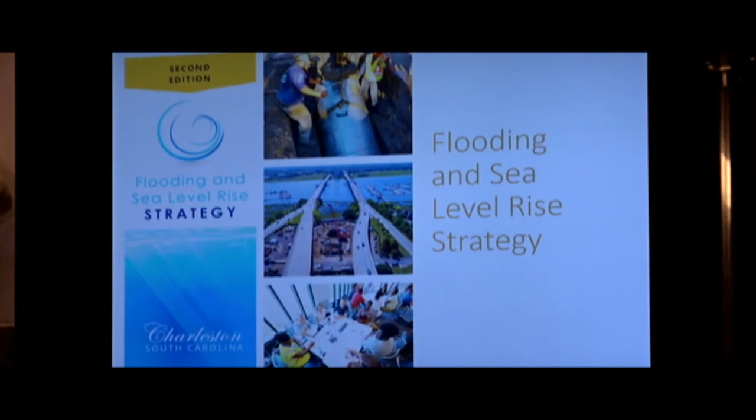At the next City Council meeting, I will be presenting to you the revised flooding and sea level rise strategy for the city of Charleston. Let's have a little history lesson first.

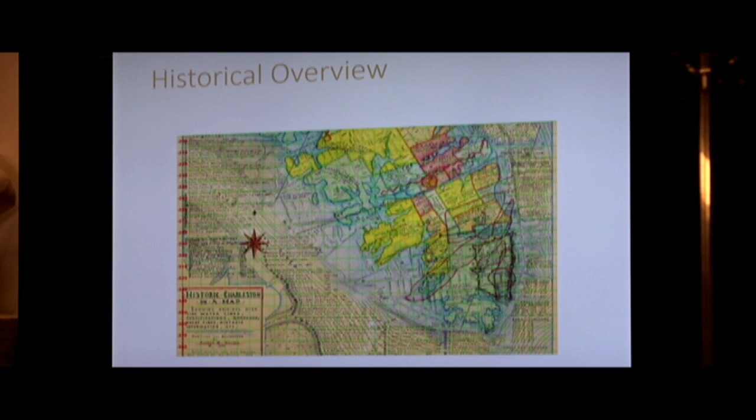If you look at this old map of Charleston, you'll see the blue areas are in fact where creek beds and marshes once were. Councilmember Mitchell, your home is in one of them. And that's where we have historic flooding in our city.

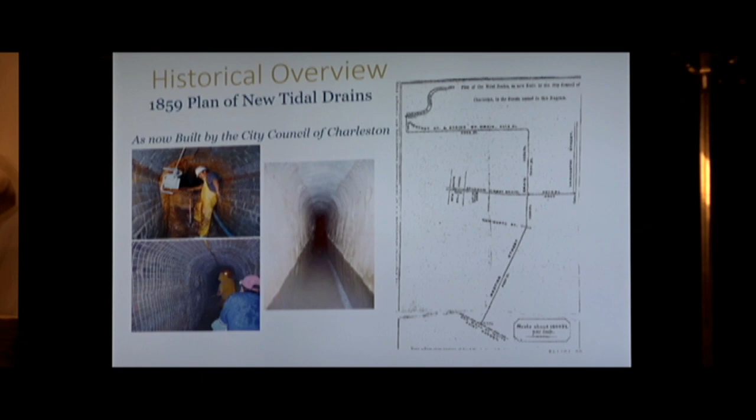So in 1859, the city in earnest first started building infrastructure to deal with drainage with these archway tunnels. The first one came down Meeting Street and ends at White Point Gardens. Tonight we approve adding a check valve at the end of that very drainage tunnel.

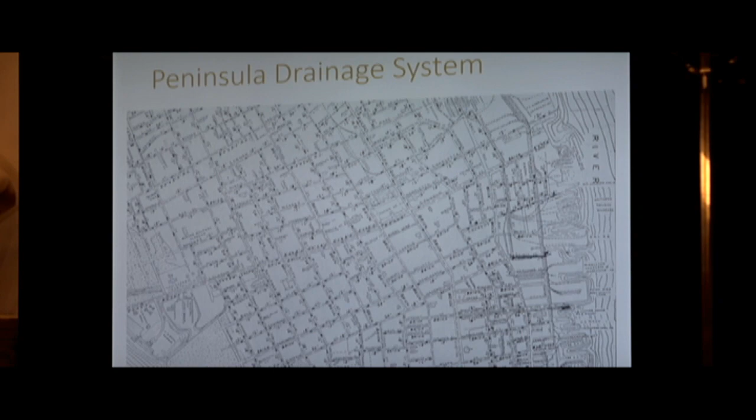Over time, the peninsula developed into this grid of undersized and inefficient pipes and flooding features that don't meet today's requirements. Likewise, West Ashley developed over the decades, first while it was outside of the city, without real requirements from the city, and also those drainage features, as we know, are inadequate.

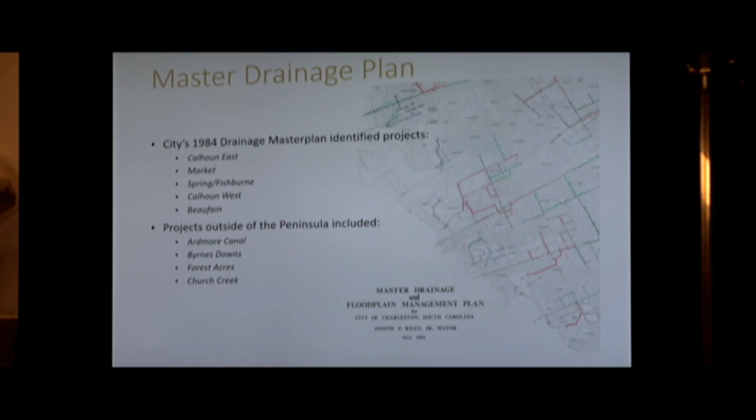So the city, back in 1984, even before Hugo, knew we had to deal with flooding and drainage, and requisitioned a master drainage plan that came up with a number of projects, some of which we're still working on today. But what happened over the last four years?

We've had historic flooding, extreme weather, hurricanes year after year. 2015, the 1,000-year rainfall. 2016, Hurricane Matthew. 2017, Irma. We had a close hit with Florence last year.

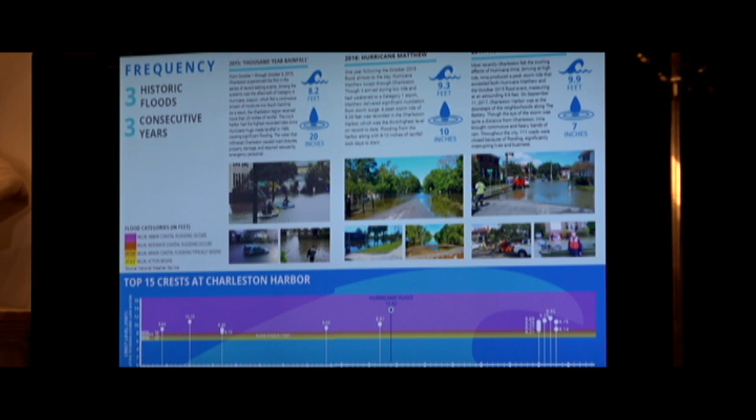Relying on science, we now know that sea level is truly rising. In the harbor of Charleston, it's actually been documented over the last 100 years that the harbor of Charleston has risen nearly 18 inches. Very reliably, the city believes in the next 50 years there will be a sea level rise of 2 to 3 feet. That's what we're planning for.

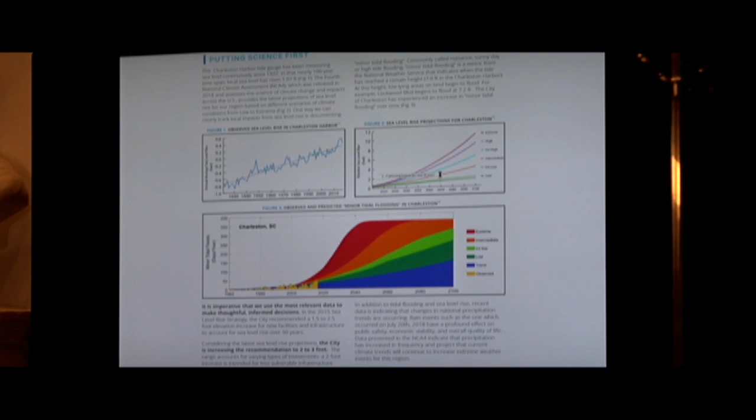And if you combine the extreme weather that we're seeing, the sea level rise that we know is coming, we have a situation that presents an existential threat to our city. If you look out generations to come, we must deal with our drainage and flooding issues and sea level rise for our city to survive, for our children and our grandchildren to be able to enjoy this city as we do today.

Next year, in 2020, we're going to have our 350th anniversary of the city of Charleston being founded. Don't we all want to see our city be able to survive and be enjoyed by generations to come for at least another 350 years?

So we have to have a vision. This flooding strategy is built on that clear vision of protecting our citizens' lives and their property, of preserving economic vitality and opportunity, and improving the quality of life for our residents and our neighborhoods.

So it comprises so many things, but it's a strategic plan with 5 critical components. The 2 we're most used to talking about in these council chambers are the projects or infrastructure, and the resources about how we're going to pay for them. Those 2 components are critical, but we're adding the consideration of governance.

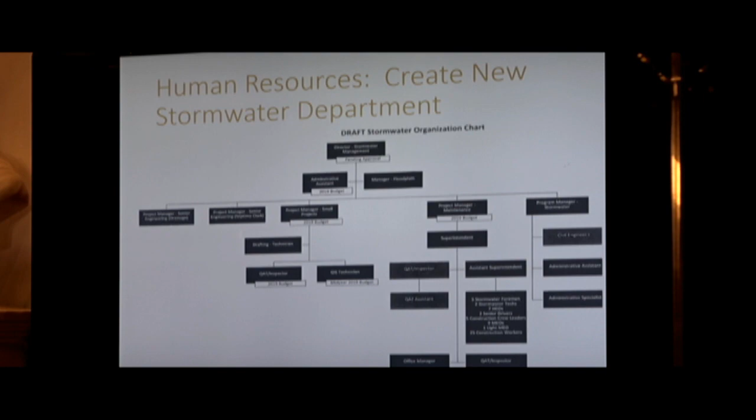So we'll talk about the resources first, and the most important is the human resources. That's why this council approved recently to create a new stormwater department for the city of Charleston, so we have a singular focus on dealing with drainage and flooding issues.

We've also, in our current year's budget, provided for new personnel to help our project managers with maintenance issues, with small projects, with inspectors, but most importantly with new construction workers to help maintain ditches and the drainage features that we have throughout the city.

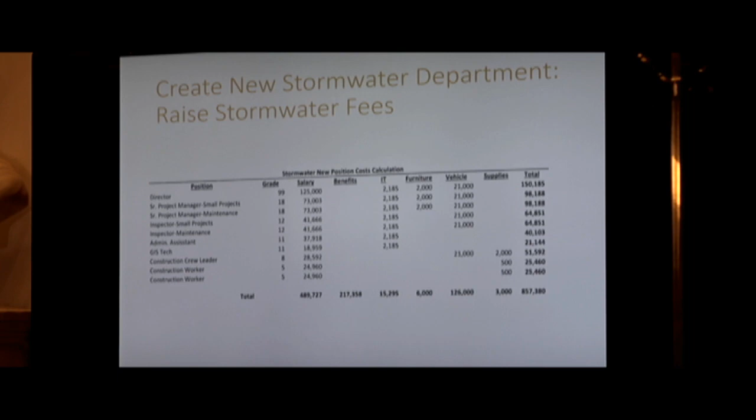We've initiated a number of resource initiatives to bring expertise like this city has never seen before, including a national effort of the Army Corps of Engineers, a partnership with the city of Charleston to bring their best experts from around the country to focus on our flooding and drainage issues.

The Dutch Dialogues - council members Gregorie and Seekings went with me last year to the Netherlands to see really what the world's greatest experts are doing to manage water and learn to live with water.

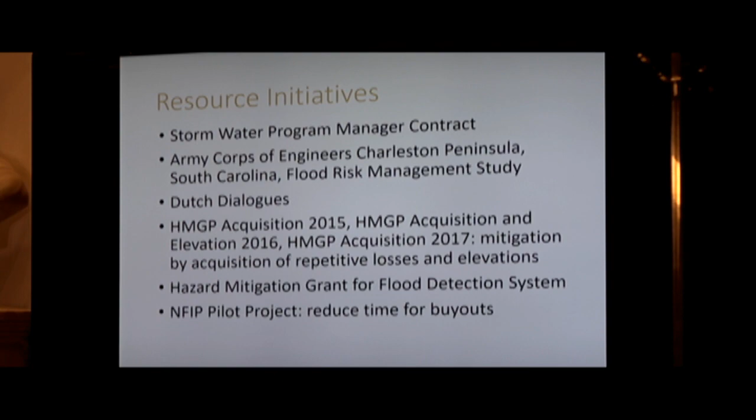Even the Army Corps of Engineers partnership began about 3 months ago. They've had numerous meetings already and have assembled Corps of Engineers personnel from around the United States to help us with this effort.

But the most important thing about this Corps of Engineers initiative is once they vet the projects that we are presenting to them, and they may augment and come up with their own projects, we will get the Army Corps of Engineers stamp of approval. And that will help us get the necessary federal funding that we need to make some of these projects happen.

It's just like dredging the harbor. Before they could begin the multi-million-dollar project of dredging Charleston Harbor, they had to get the Corps of Engineers stamp of approval. And that's what we're doing with them.

The Dutch Dialogues is going to be an amazing process over the next 7 months to bring the world's leading experts on drainage and flooding.

This was an example that we saw in the Netherlands where they literally created new space for water to go, because we realize that we have to manage water. We can't always fight it and win the battle. We need to create spaces as we develop for water to be able to go to.

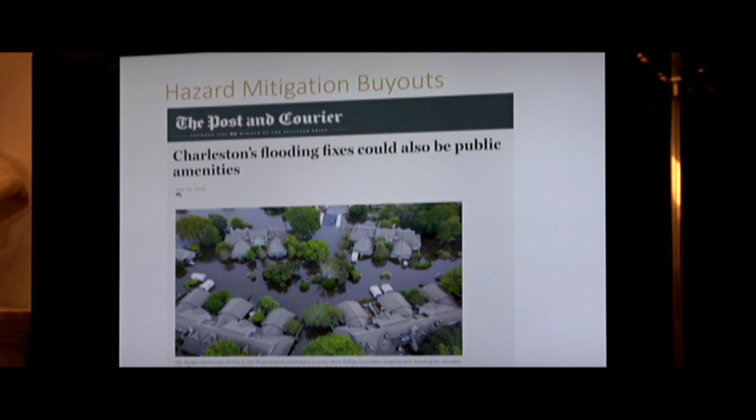Hazard mitigation buyouts. This is a scene of Bridge Pointe townhomes in Shadowmoss neighborhood that had flooded repeatedly over the last 3 years. We applied and received a grant along with FEMA to buy these homes out, and we're about to finish closing on them.

Just like the Dutch did, I envision that we could have a lovely green and blue natural space that will absorb more water and also, as the Dutch would recommend, always provide an amenity for the quality of life for our citizens.

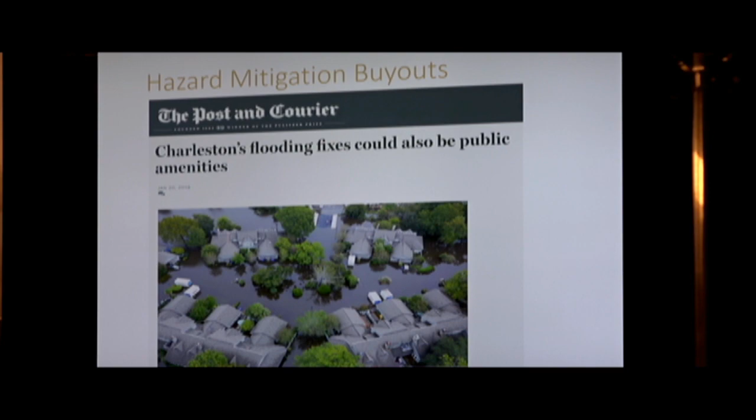Funding sources - how are we going to pay for all these projects? Folks, there's no silver bullet. It's not going to come from one place. We've got to cobble together a variety of resources from every place that we can think of, including our own drainage fund, including our general fund when needed, including tax increment finance districts, including the half-cent sales tax that Charleston County collects, the State Infrastructure Board, accommodations tax.

We have presented again to the state legislature and hope that it will pass this year. We believe it will, to allow the city of Charleston to be able to use accommodations and hospitality taxes to pay for drainage improvements and other grants as well.

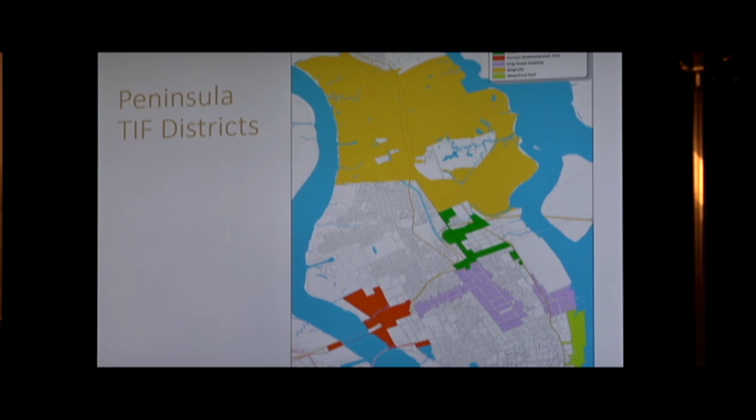This is an example of different TIF districts in the city. These are on the peninsula. Where you see the colors are areas where the city has created these special taxing districts where we get extra property tax in order to invest in public infrastructure, including drainage projects.

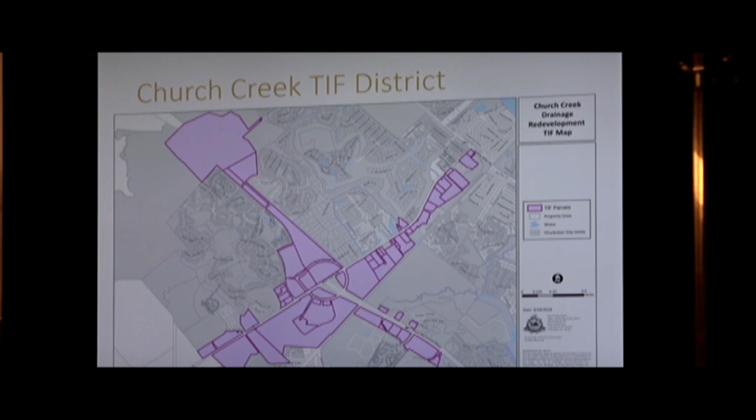We've recently created the Church Creek TIF District west of the Ashley. This is the only TIF district in the state of South Carolina that was created 100% - every dollar will go to drainage improvements within and around the Church Creek drainage basin.

The half-cent tax allocation - every year, Charleston County allows application to the half-cent, mostly for transportation uses, but also for drainage as well. We've met with the county where appropriate, where they're doing a transportation project like the widening of Glenn McConnell, and we have a project we want to do to reconnect Lake Dotterer to the Long Branch drainage basin to be able to use half-cent sales tax transportation dollars for that drainage project.

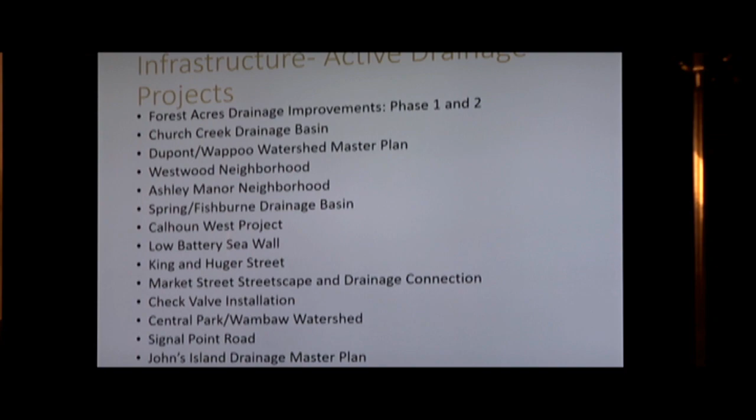Then, the infrastructure. What are you actually doing? What are the projects you're working on? Here's a long list, including Forest Acres, Church Creek Drainage Basin, and right on down the line. I'm going to show you highlights of a few of the projects we're engaged in now and have plans to do in the near future.

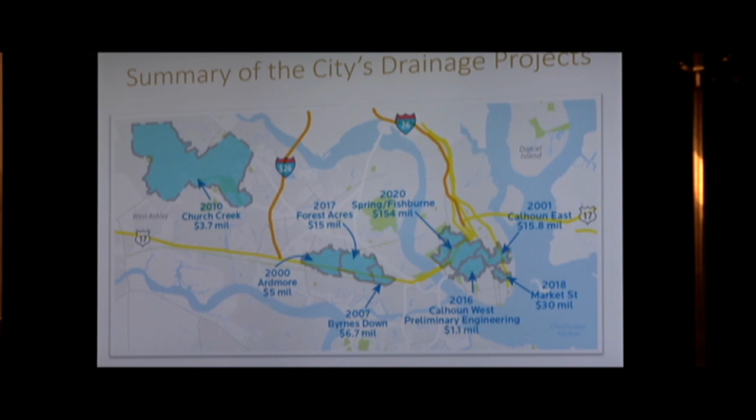This map shows a summary of some of the drainage projects that were established back in that 1984 drainage study, but many of which are still ongoing, including the Forest Acres project and the tunnel systems downtown.

In addition, we're providing check valves at the major outfalls, where stormwater goes back to a river or to the harbor, to prevent storm surge and tidal action from pushing water up into our storm drain system. These are very effective, and even though there's a prediction that we'll have many more sunny day flooding days as time goes on, these check valves have already produced benefits in the locations where they've been installed.

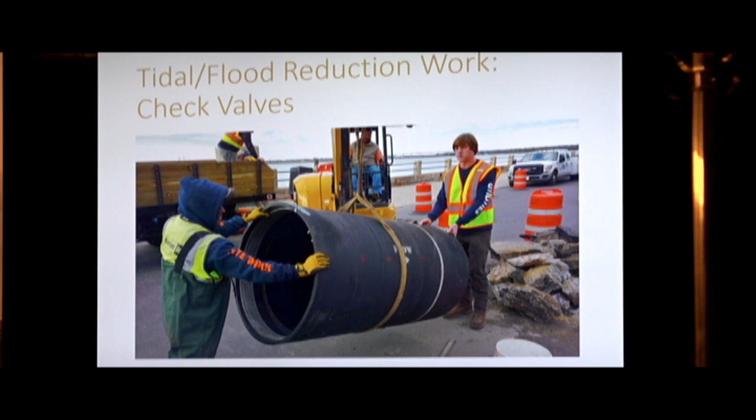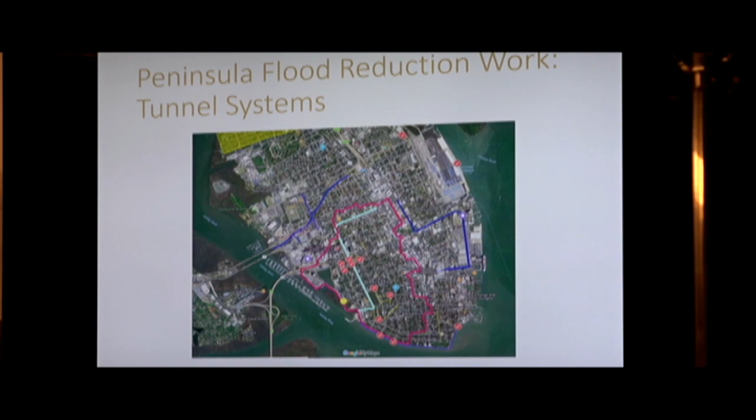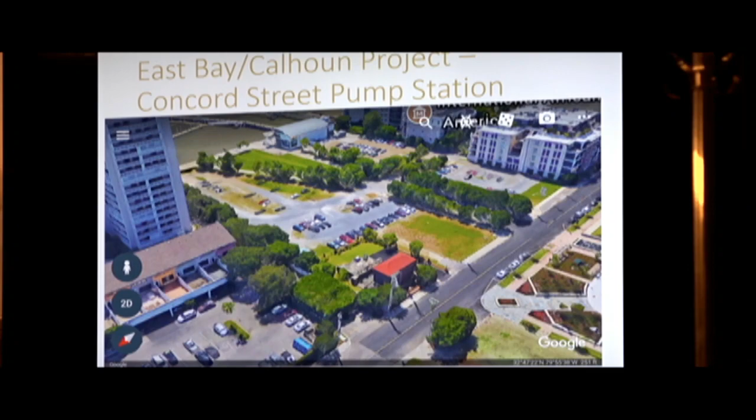The first tunnel system came down Meeting Street, over Calhoun Street, to the Concord Street pump station. This is right in front of where the new International African American Museum is going to go. During Hurricane Matthew, this pump station pumped about 58 million gallons of water out of the city and into the harbor in a 24-hour period.

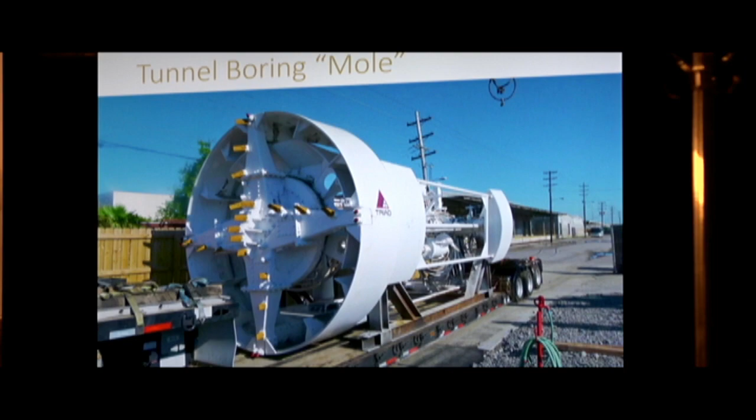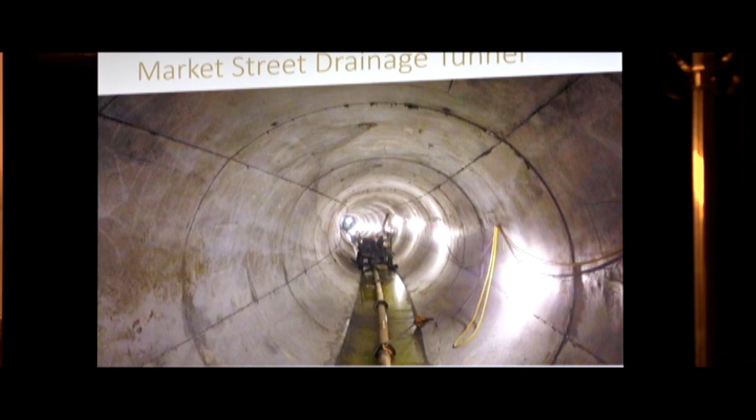This is one of the machines, called a mole, that drills the tunnel systems. And here's what a tunnel looks like under construction, before it's completed with its cement shell. That's close to a final product before being put into use, just to show you the scale of a typical tunnel system.

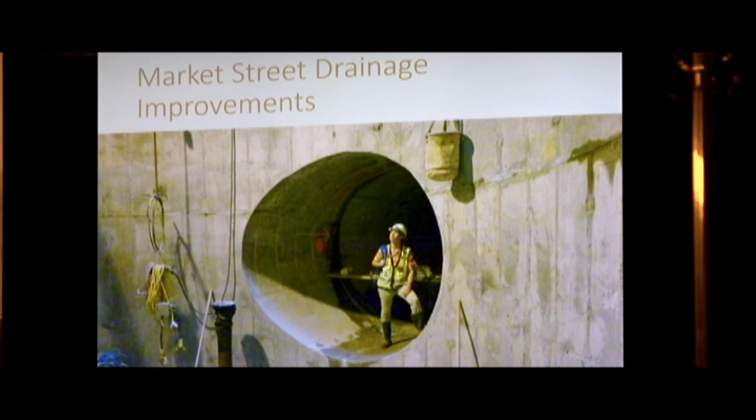Market Street will be added to the Calhoun and Meeting Street tunnel system. It's already been added underground, with 3 drop shafts connected to that tunnel system. But to tell you the truth, all the storm drains along the street have not been connected yet. When we do a streetscape improvement of Market Street, north and south, starting this year, it will connect all of those storm drains to the tunnel, and it will make an amazing difference, as it has along Meeting and East Bay Street and Calhoun Street.

How many remember 20-plus years ago what it was like every time you got an inch of rain at the corner of East Bay and Calhoun Street? It would immediately flood with about 2 or 3 feet of water. Doesn't do it anymore. The tunnel systems can work -- they do work.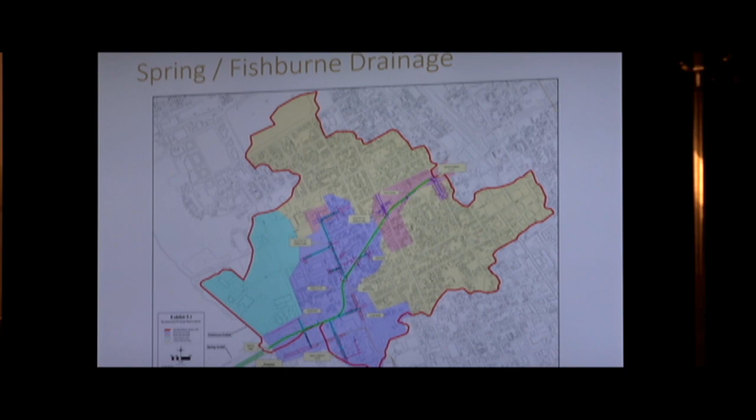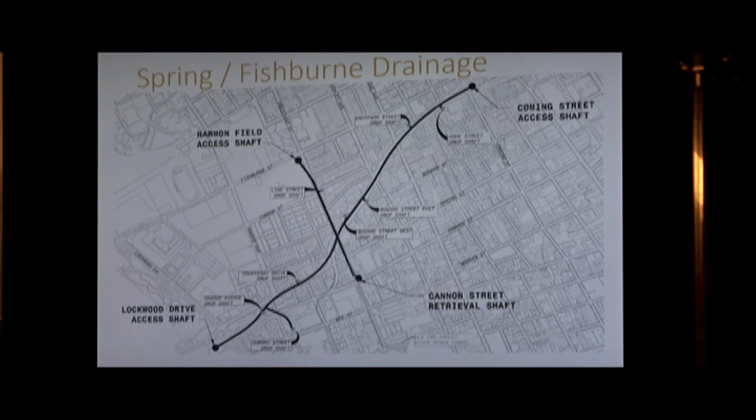This shows a little more detail of where the tunnels will go, from Coming Street up on the right-hand side, down to the drop shaft between the two Ashley River bridges, and then a cross tunnel that starts just below Burke High School and runs down to Cannon and President Street.

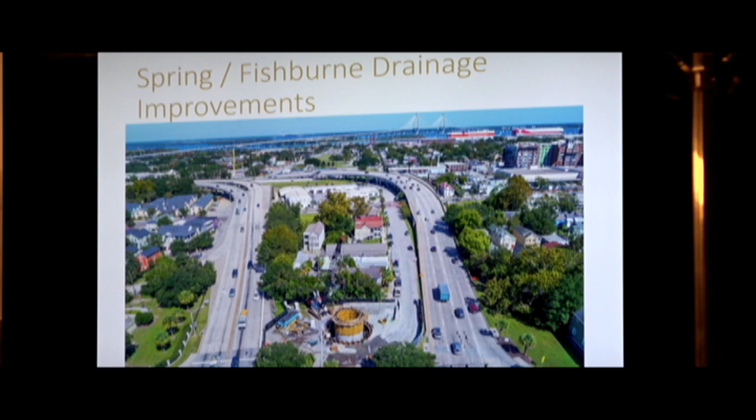This photo shows the drop shaft at Coming Street, right where the interstates end. This drop shaft will be the site of the wet well and pump station that will evacuate this whole tunnel system when it fills with water, pumping it into the Ashley River. It's estimated that the 3 pumps installed at this location will far exceed the capacity of the Concord station, able to pump up to 500 million gallons in a 24-hour period.

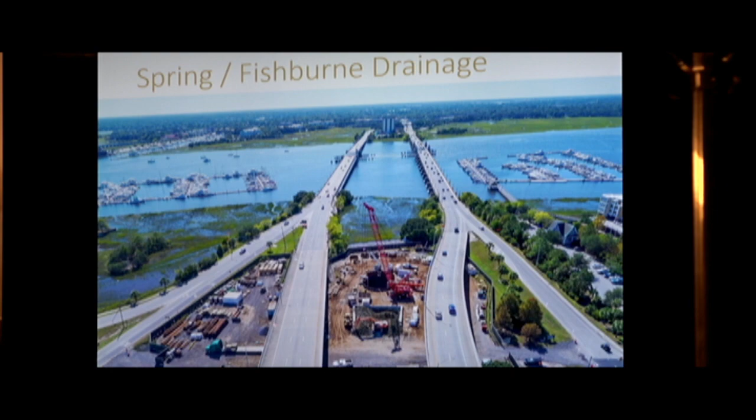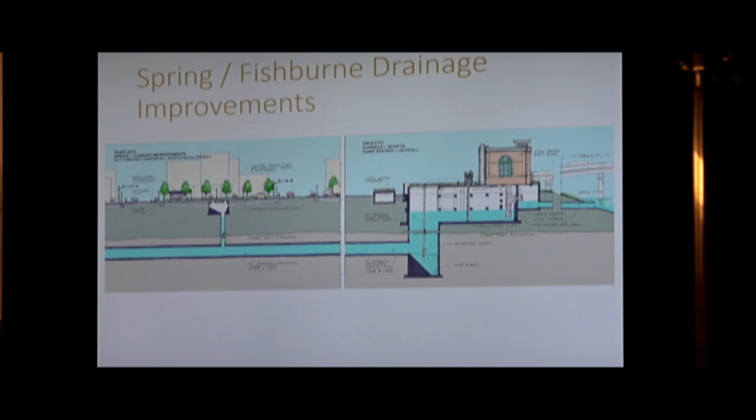This diagram shows the tunnel underneath the Spring-Fishburne drainage system and what the wet well system with the pump station will look like. And finally, a rendition of the pump station itself once it's installed on top of the wet well. This system will end the day when the Septima Clark Parkway is a hindrance to mobility in our city whenever it rains. This will make the difference, folks.

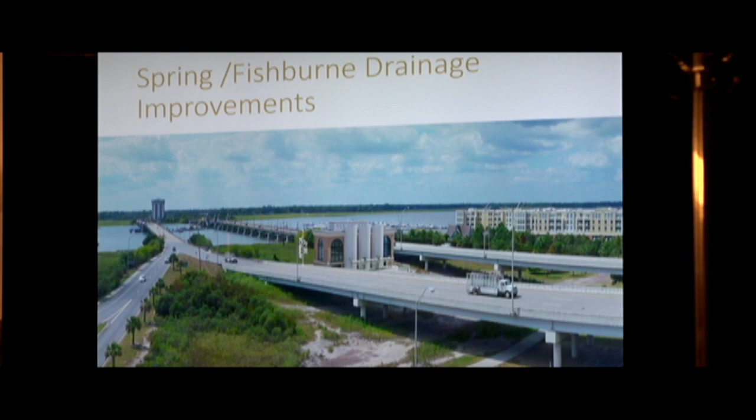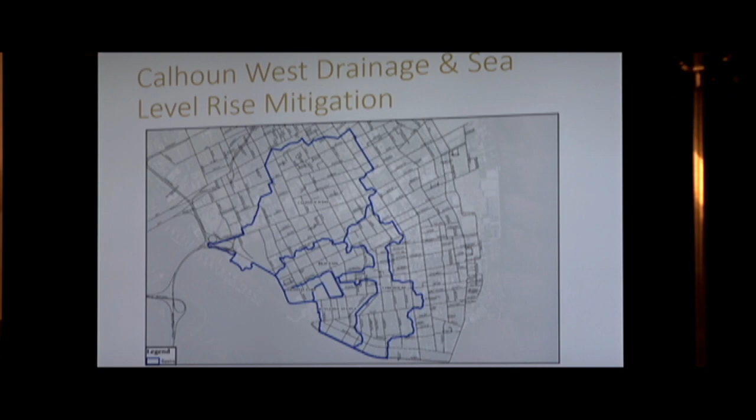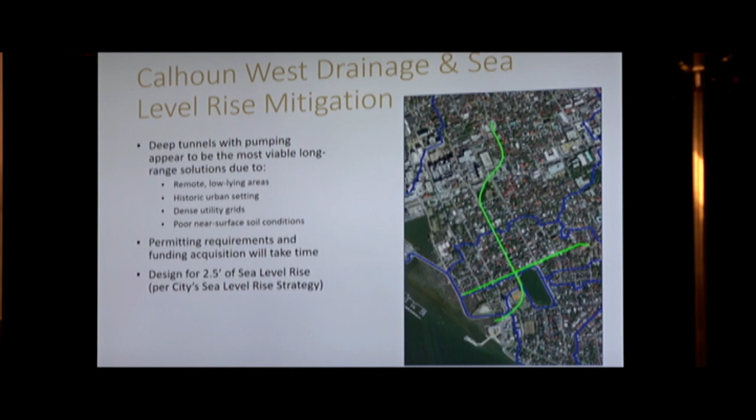This last tunnel system would be the Calhoun West, a nearly 700-acre area, combining drainage basins on the lower western side of the peninsula of Charleston. This shows where the tunnels will go, starting up at Morris Street and St. Philip, and running all the way down to the Coast Guard station just below Broad Street.

Finally, on the peninsula is our low battery wall protection, which will begin this year to rebuild and heighten the low battery wall. So this is what I envision for the peninsula of Charleston.

Eventually, we will have a perimeter wall protection all the way around the perimeter of Charleston, but done in a way where it's a benefit to our citizens, with walkways and amenities, and then have the tunnel systems in place so that when rainwater or other water happens to get beyond the perimeter wall, we'll be able to pump it out. It's an amazing technology.

It's very complex, but it's a system that will really work for the Peninsula of Charleston.

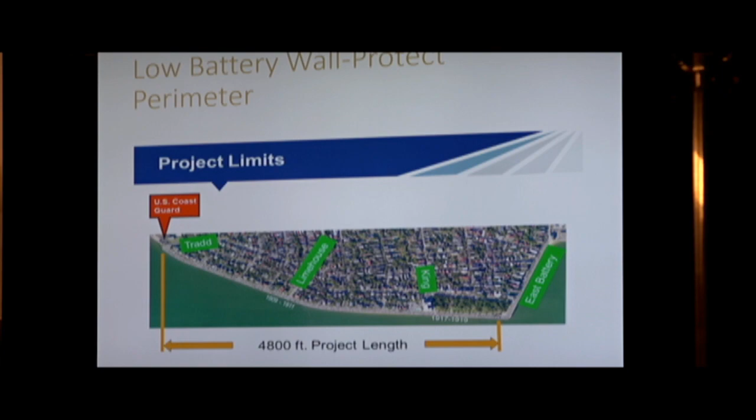Turning to West Ashley, we've just completed phase 1 of the Forest Acres drainage improvements, which converted an old pump system to a gravity flow system. It's always best if we can have open conveyance, open systems that work with gravity rather than having pumps if possible.

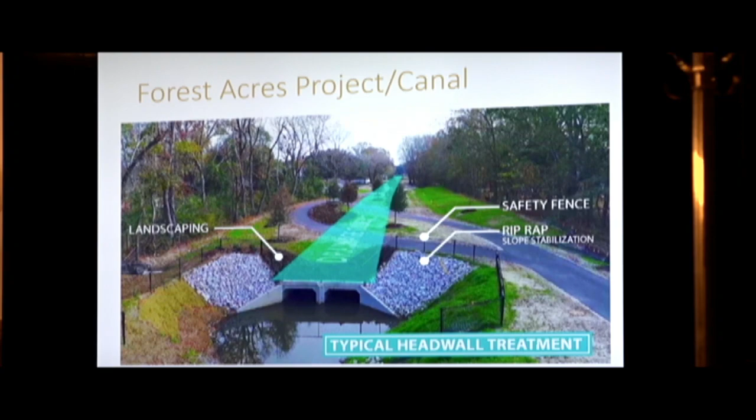Phase 2 on this project will start this year. This map shows the drainage basin that phase 1 and phase 2 cover, all West Ashley. This is about a 300-acre drainage area.

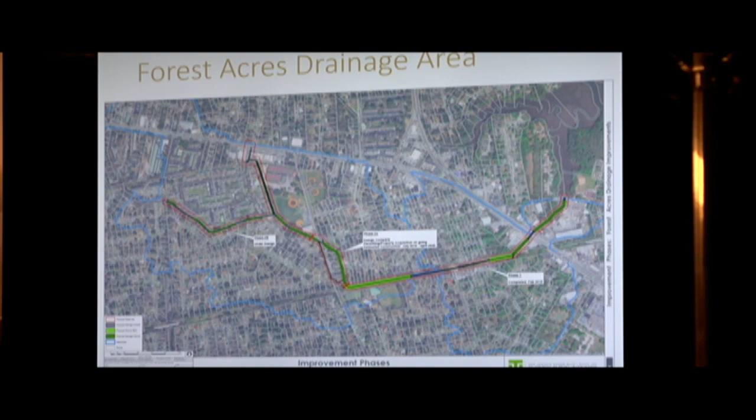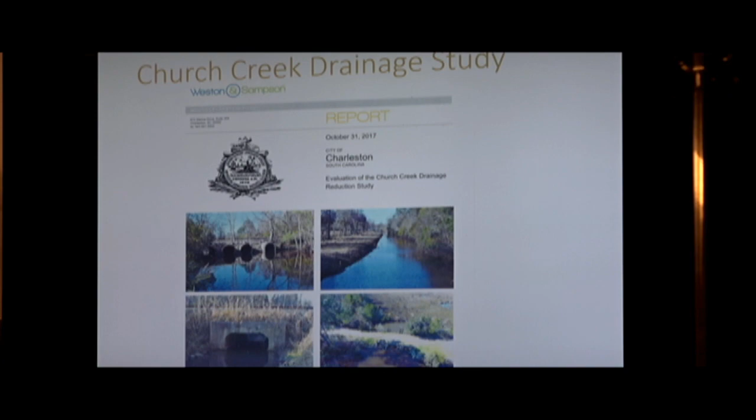Earlier last year, we completed the Church Creek drainage study that came up with 7 different projects costing about $50 million that will need to be accomplished in order to address drainage in the Church Creek drainage basin. The first we've already started, the Hickory Farms diversion channel, but there's more to come, and luckily Council has approved that TIF district I mentioned in order for us to have a funding stream to put these improvements in place.

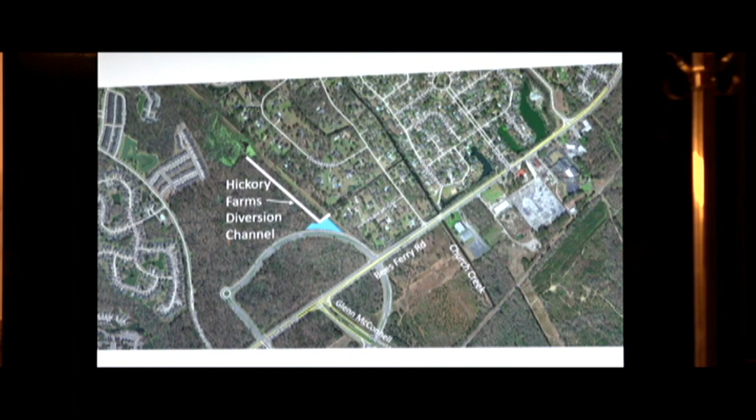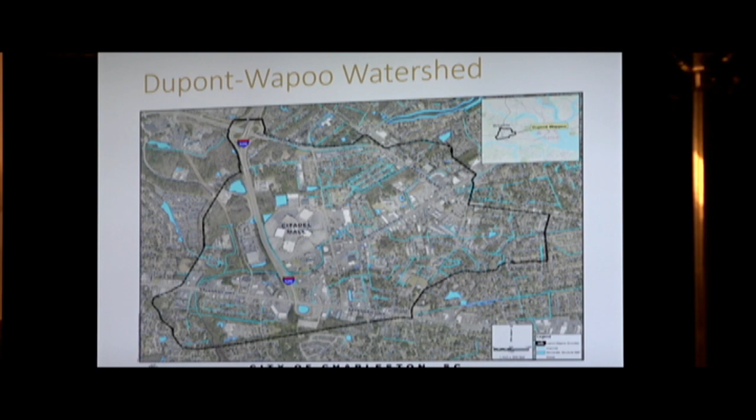This watershed is called the DuPont-Wapoo watershed, and it's about a 500-acre area. It's not just a study. As we've been going through and identifying the drainage features in this area, we've been doing maintenance and repairs, and we'll be planning further projects that will improve drainage in this watershed.

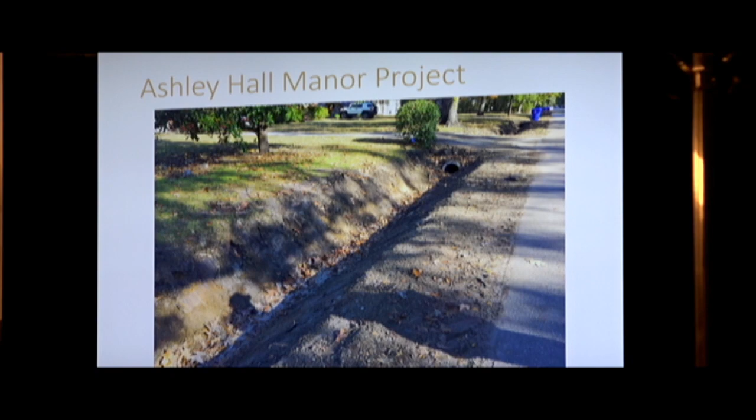In the meantime, we've been engaged with smaller neighborhood projects that help drainage, like the Ashley Hall Manor drainage project, which improved the ditches and created another easement for water to get out of the neighborhood. In a similar fashion, we've just started the Westwood project, which is right next to Blessed Sacrament Church there on Moore Drive off of Savannah Highway.

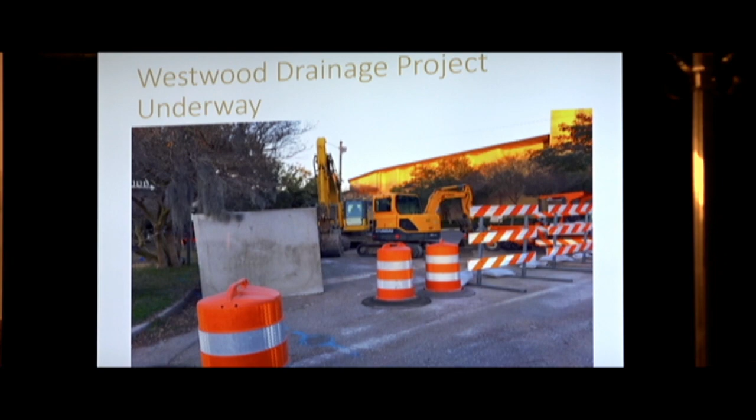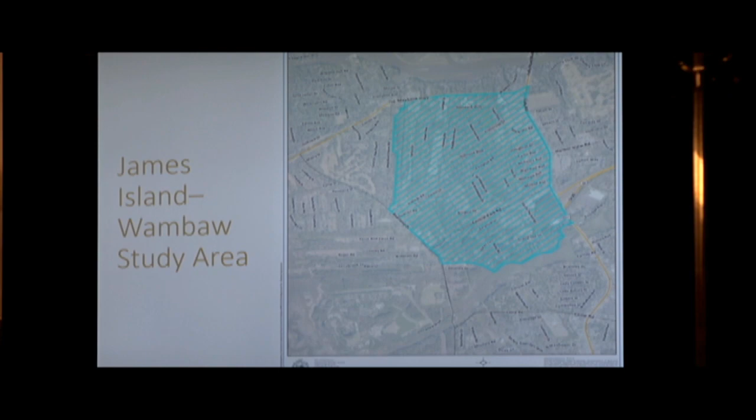On James Island, the county is helping us with a study of the Signal Point Road area, and we all agree, we've been talking about this tonight, the Wambaw area study area is the next study area for the city-county cooperative effort, which will involve many projects to come.

In a similar fashion, the Johns Island master plan is being done for drainage improvements. It was precipitated by a problem in the Barberry Woods neighborhood.

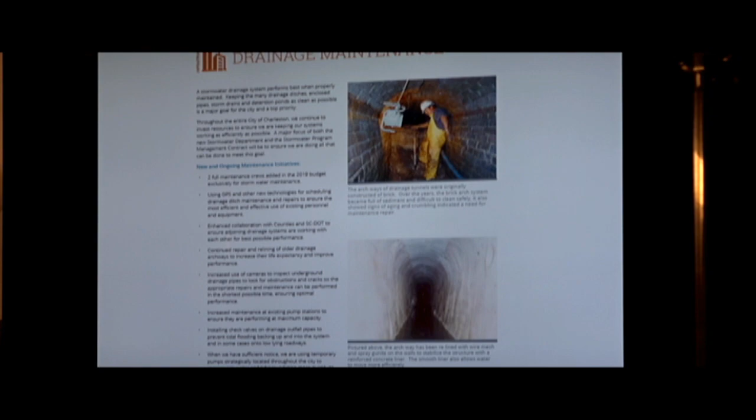Maintenance, though, is a key thing. And I want to add, we're adding new technology in order to keep track of ditch maintenance. We've added GIS mapping to all our ditch maintenance, and that will increase accountability and reliability of our projects.

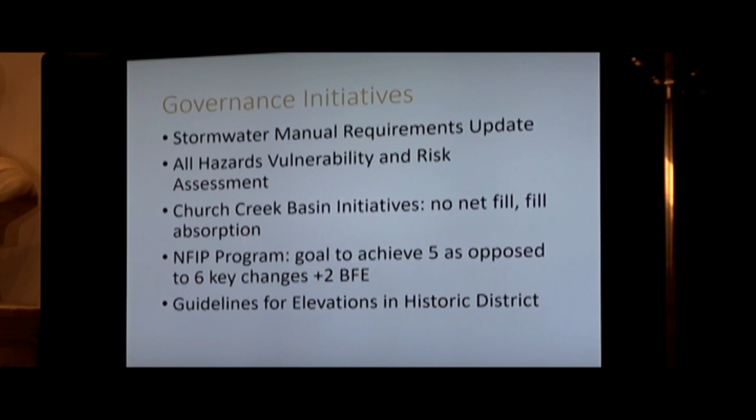Now, for governance, the rules and regulations that control all this. The big thing is that the city will this year improve and update our stormwater manual, and we've already put in place new requirements for the Church Creek drainage basin because they were so important there. So we'll be doing that this year.

Our task force has already been assembled and has been meeting. We'll be bringing those recommendations to council this summer. We're improving our rating system so folks can save more money on their flood insurance. Now we've got a 20% savings. We hope to earn enough points with the National Flood Insurance Program to get 25% savings for our citizens.

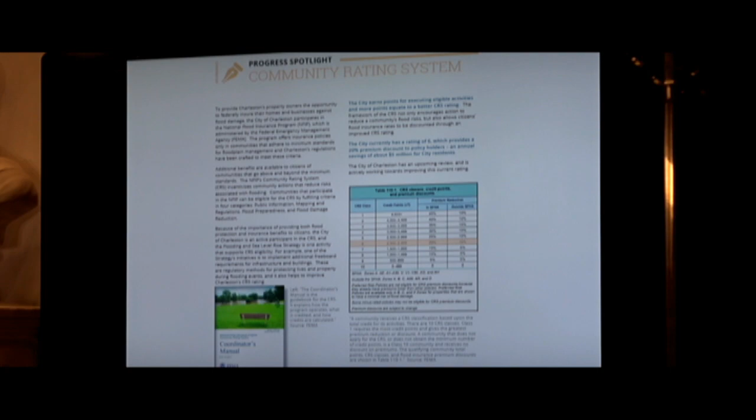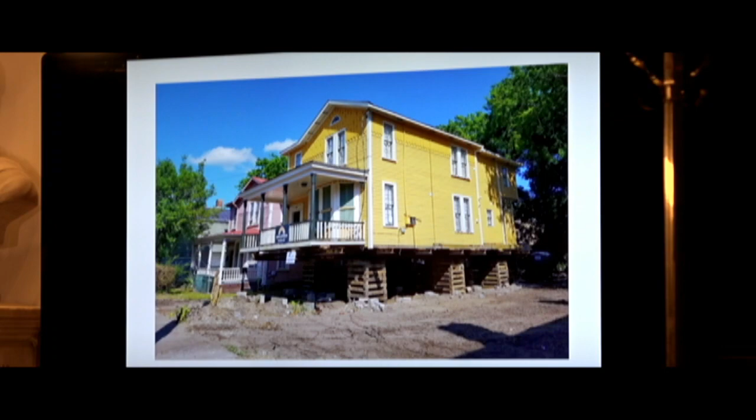We've put new regulations in place for elevating homes in the historic district, and this is also part of the mitigation grants that we're applying for, not just to buy out homes that have been repetitively flooding, but also to elevate homes that need to be elevated.

Lastly, the other initiative or component of our strategy is outreach, to encourage and invite our citizens to be a part of this effort, to advocate for the changes we need, the changes in policy and legislation, but also to be aware that even citizens on a daily basis can help to make sure they've got their flood insurance, to keep a clean yard so that debris doesn't get in a storm drain, to help us keep storm drains clean near your home, to adopt green practices, planting more trees, having green roofs, collecting water in water barrels.

All these things we'll have to do together as a community to create a mindset among Charlestonians, not only of the importance, the existential importance of dealing with flooding and drainage, but for us all to become a part of the solution. So folks, that's a vision to protect our city, our citizens, our safety, our property for the long term, for generations to come.

This is the issue that we must address, and all these things are coming together here in 2019 in such an incredible way, bringing the expertise from around the world to review our projects and add to them, to help garner the resources both from initiatives that we're doing and from the money that we need to apply for to pay for the infrastructure and to involve our citizens.